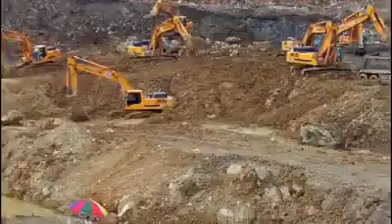But the Subic shipyard didn't have such an easy start. What made this project possible, despite such difficulties, was HHIC Phil's enthusiasm, which turned crises into opportunities.

Starting in May 2006, HHIC Phil completed the construction of a mega-scale shipyard on 304 hectares of land in merely 35 months. Prior to construction of the shipyard, HHIC Phil also won the bid for 12 container ships, writing a new chapter in the history of global shipbuilding.

HHIC Phil was also awarded a presidential award by the President of the Philippines in July 2008, for the first time in Asia.

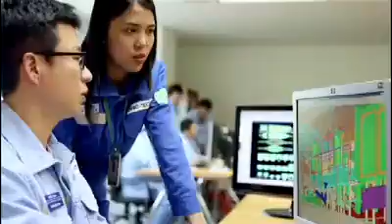The Subic shipyard serves as a mechanism for maximizing synergy in economic development for both Korea and the Philippines. And it helped the Philippines become the fourth biggest shipbuilding country in the world. It has also contributed to creating over 20,000 new jobs and has been considered a role model for our mutual growth.

The layout of the shipyard and production system, built according to a thorough design plan, is creating a new paradigm in the design of efficient global shipyards.

The world's largest dock, number 6, is 7 times the size of a soccer field and has a capacity of 450,000 tons per year. Dock number 5 also has a capacity of 250,000 tons. In addition, there is a 3.8-kilometer long quay as well as 4 giant Goliath cranes. It is a global-scale shipyard.

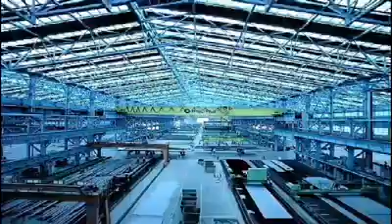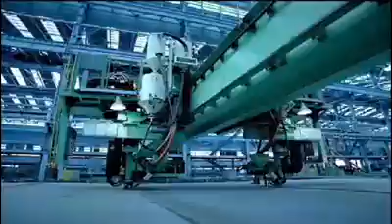The pre-treatment and cutting shop are arranged into 4 buildings and boasts state-of-the-art equipment including 21 plasma cutting machines and a 2,200-ton roll press. It has the capacity to pre-treat and cut 500,000 tons annually.

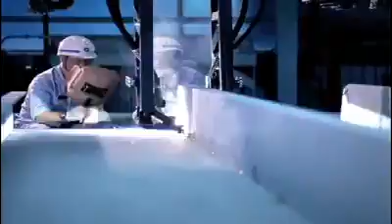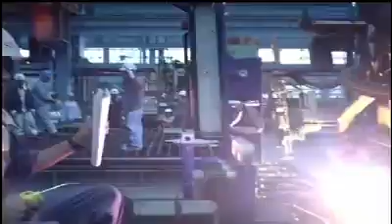At the 175,000 square meter assembly shop, individual blocks of the ship are manufactured in its own specific assembly shop. Then the blocks that span over 1,000 meters are welded together in merely 40 minutes using a high-performance and high-efficiency automated production line system. A large-scale moving shelter makes it possible to work indoors despite the frequent rainy weather in the Philippines, which greatly improves productivity.

The Subic shipyard boasts the ability to secure materials and supplies as well as state-of-the-art production equipment. The shipyard has a total of 9 ships, including 2 multi-purpose carriers, tugboats, and ro-ro vessels. Core materials and components are directly procured from Korea using these vessels, which helps with competitiveness in cost and quality.

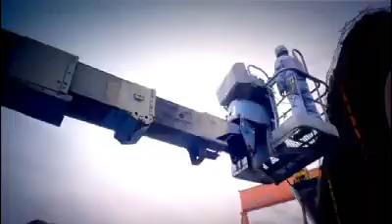The Subic shipyard, which has large-scale facilities and state-of-the-art equipment, built numerous vessels starting with a 4,300 TEU container vessel and a subsequent 6,600 TEU container vessel.

It also has the capacity to build all types of merchant ships, including 114,000 and 160,000 ton crude oil tankers, and 180,000 and 205,000 ton bulk carriers.

It also created the foundation for the offshore structures market by building a CALM buoy, which serves as the bridge between fixed platforms and shuttle tankers, and an 18,700 TLC floating dock for the production of caissons. It also has a portfolio of various offshore structures, including a near-shore barge to support offshore plants.

It is now focused on full-scale production of high-value-added vessels, including the VLCC, VLOC, tankers, QMAX LNG tankers, LPG tankers, drill ships, and the FPSO.

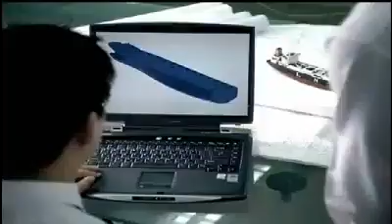With expertise gained from various projects, the shipbuilding industry is a technology-intensive industry that needs to respond to the increase in the size and speed of ships and the increased role of information technology. The competitive edge in terms of design and production is based on these three areas.

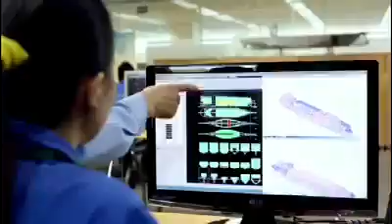Through close partnerships with Yeongdo Shipyard and the R&D Center, the Subic Shipyard constantly strives to improve the design of ships, develop digital shipyards, eco-friendly construction, and future-oriented R&D.

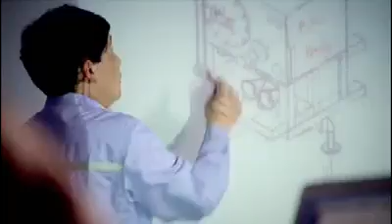It is involved in a variety of R&D efforts to create quality ships, including developing and validating various ship models, developing dust-proof design, and advanced automation systems.

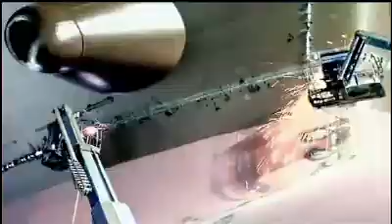HHIC Phil aspires to become the mecca of ship construction that brings customer satisfaction by securing the world's most powerful technologies.

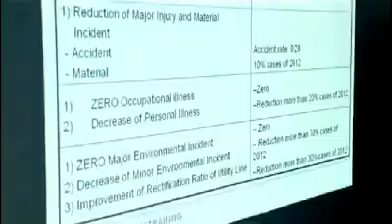A comprehensive safety and environmental system is the foundation for creating excellent ships. Under the motto Safety First, HHIC Phil is committed to 3-Zero HSE policy.

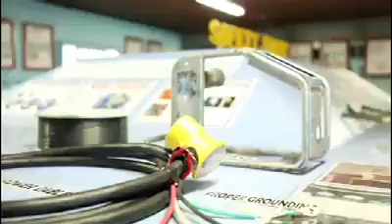Its Safety Education Center models the actual work site, allowing managers and plant workers to experience the work firsthand and understand the importance of safety management.

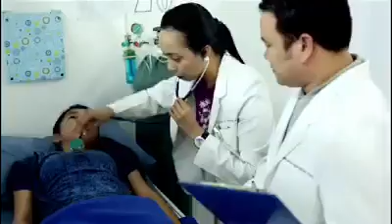There is a medical clinic on site with doctors and nurses to manage the health of the employees, as well as respond immediately to accidents. The clinic works closely with a nearby hospital to minimize the occurrence of diseases and injuries.

These measures helped acquire the OHSAS 18001 safety certification and ISO 14001 International Environmental Certification in 2009, equipping it with the appropriate international safety and environmental systems to carry out its projects.

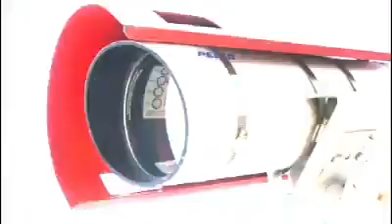As the shipbuilding industry developed into a technology-intensive industry, shipyard security became more important than ever. HHIC Phil's central control room quickly and accurately grasps happenings within the shipyard and takes a complete security stance when situations arise.

Strict access control, including a 3-level iron gate, a license plate number recognition system, an emergency access control device, an X-ray vehicle search device, and biometrics access system, has been employed at the shipyard.

HHIC Phil also provides luxury apartment-style accommodations to enhance the quality of life for the ship owners. High-quality infrastructure, including an international school and hospital for children and families living in Subic, also contribute to a safe and reliable business environment.

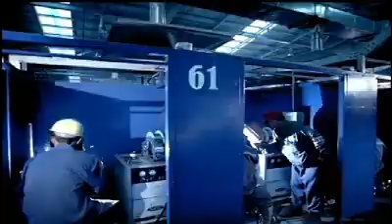HHIC Phil aspires to be a company for the people by engaging in a variety of social contribution efforts. One of the ways HHIC Phil contributes to local regional development is through its world-class 2,500-person capacity training center to train and develop a select group of local talents.

HHIC Phil also cares for the welfare of its employees. The company built a total of 1,000 employee housing units and offered them to employees for an affordable rate.

The company is also at the forefront of improving the quality of life for the local community by donating a variety of community facilities. In addition to these, HHIC Phil provides various medical services, including free health screenings and medicine for local residents without adequate medical care.

HHIC Phil will continue to do its best to make the world a better place for everyone by contributing to society.

We're preparing for the next century. HHIC Phil's Subic Shipyard is creating a new paradigm for offshore plants through its world-class ships and technology.

Subic Shipyard will change the future of the shipbuilding industry, and that change begins now. Run to the new world. HHIC Phil Subic Shipyard.